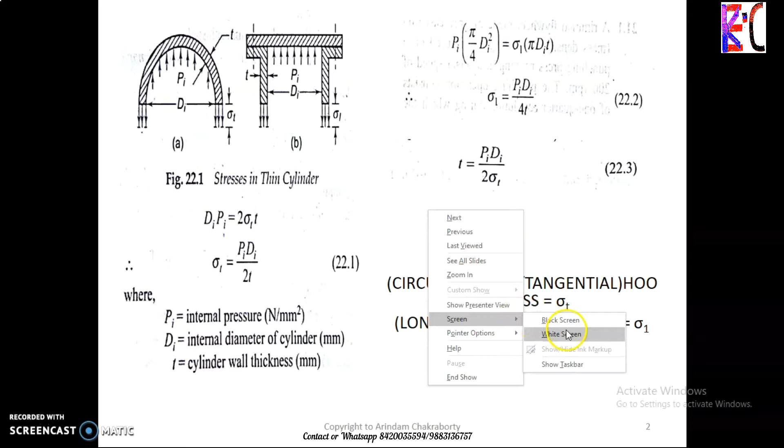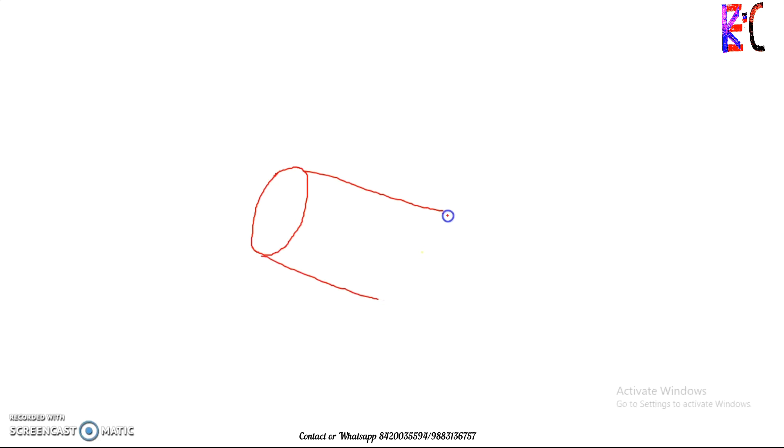Let me take one pen on the white screen. If you consider a pressure vessel like this one, the pressure acting on this circumference will be your hoop stress. Now the longitudinal stress, let me draw it. The pressure acting on the entire circumference is termed hoop stress, and the pressure working along the longitudinal direction is termed longitudinal stress. This circumference is connected to hoop stress, and this is connected to longitudinal stress.

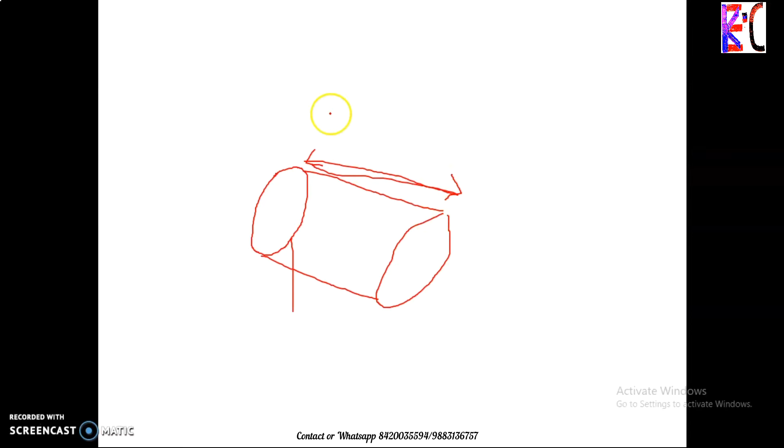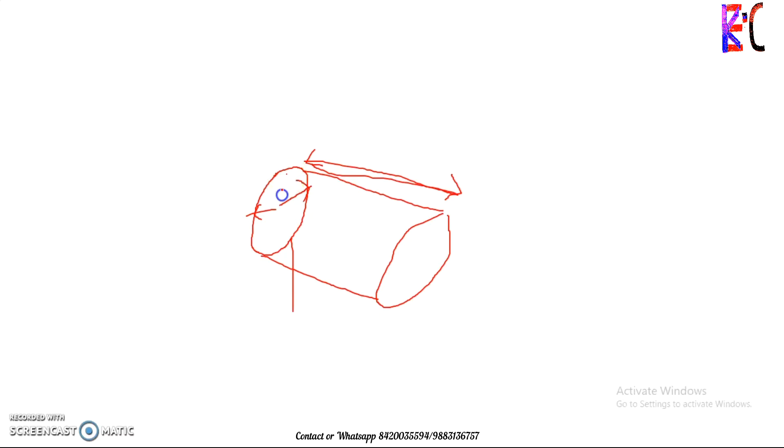How does it accumulate? If a body is highly pressurized, a force is acting from the center to every point of the circumference. That means you can't smash the bottle, as you can see in our cold drinks or soft drinks bottle. After opening the cap and retightening it, you could smash the bottle. But without opening the cap, the fluid inside is completely pressurized, so you can't smash it. So this is what happens.

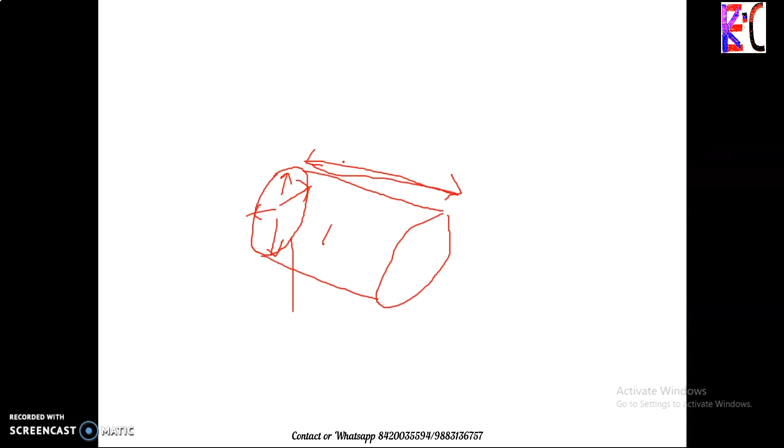So we have learned about pressurization and got one idea: one stress works on the circumference, one works on the longitude. Now pressure vessels have been divided into two categories: thick cylinders and thin cylinders. Scientists came up with a solution for how to determine thick and thin cylinders. So why is it so necessary?

Because to hold a pressure, sometimes you need to increase the material a lot, or decrease it. If you are holding an enormous amount of pressure, the border lining or circumference of the pressurized chamber should be maximum. So how much should it be? To understand the maximum and minimum thickness of the body to be assigned, ASME as well as the other regulators started features including thin and thick, so that they make it understood which one is thin and which is thick.

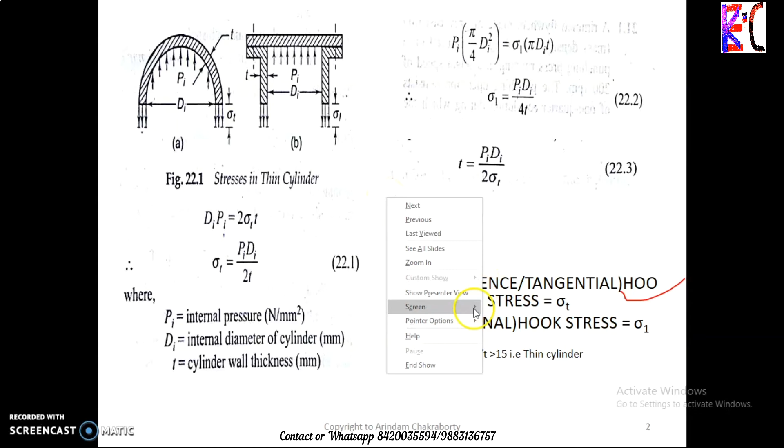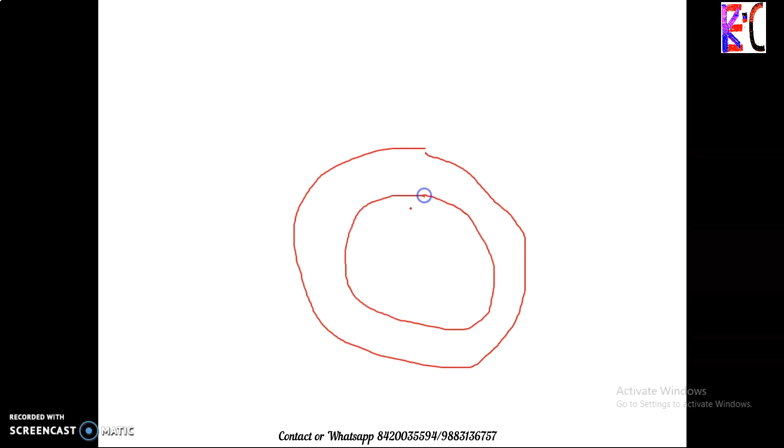Okay, my right click, and it's going to the white screen. Okay, so let us consider one circumference, another circumference. Take this to be the thickness T. This is the center of the circle, and this one to this one is di.

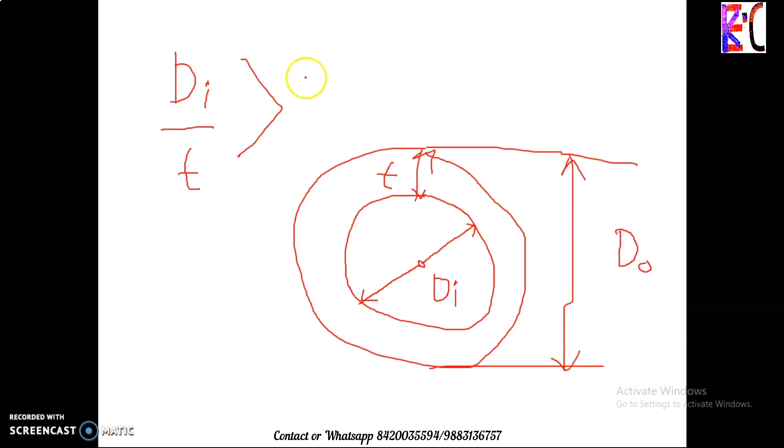Just a minute, let me complete this. Okay, let us understand what I have drawn. This is to make you understand in the simplest way. Let me make it visible. Okay, this is the thickness. Now what is the thickness? This is a cylinder, a cylinder cross section.

So this is the internal diameter of the cylinder and this is the external diameter of the cylinder, and the thickness is d naught minus di, that is d outside minus d inside, that is t, the thickness of the cylinder body. Understood? As per the ASME consideration, the ratio of di by t should be greater than 15 to consider a thin body.

So let us take one example. If the internal diameter is 15 and the thickness is 2, what comes? 15 divided by 2, that is 7.5. That means it's a thick cylinder, because we know for a thin cylinder the ratio should be greater than 15.

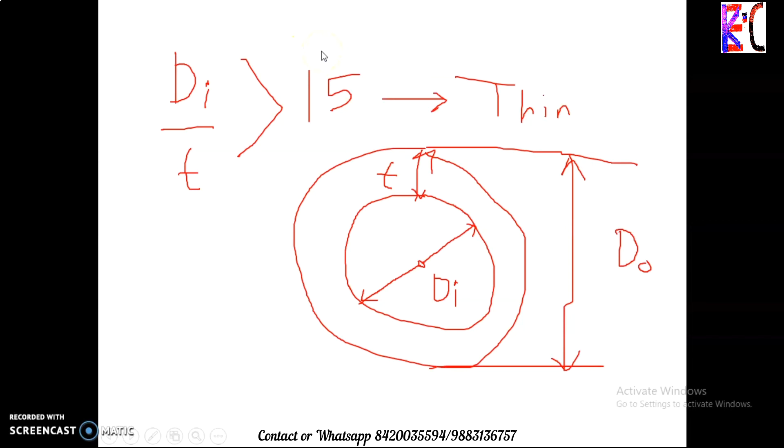If you have any problem, you could ask me again. This is not the first and last class. This is just the first class, an overall class. The problems will be solved in your coming classes. If you have a query, you may ask me. So let us go onward.

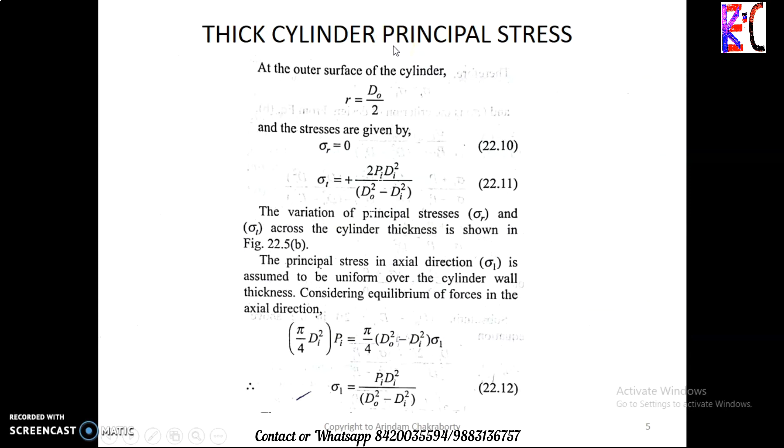Okay. So we have learned what thick cylinders are, how we consider thin cylinders, and how we consider thick cylinders. First of all, we calculate the thick cylinders in consideration of principal stress and strain. After that there are some laws. The thickness T, as you can see over here, is written as T.

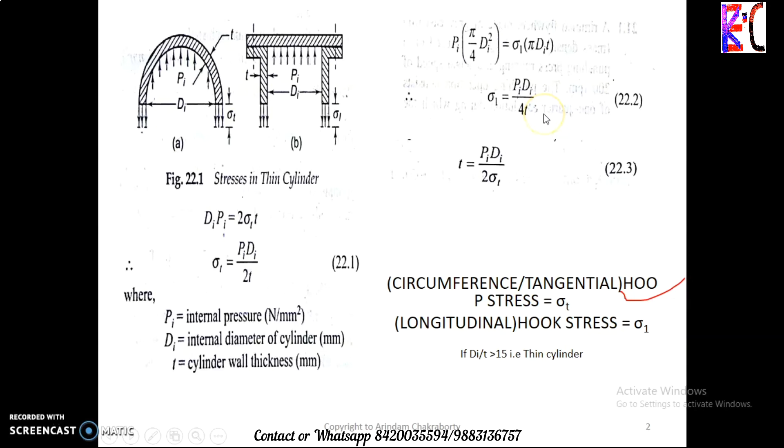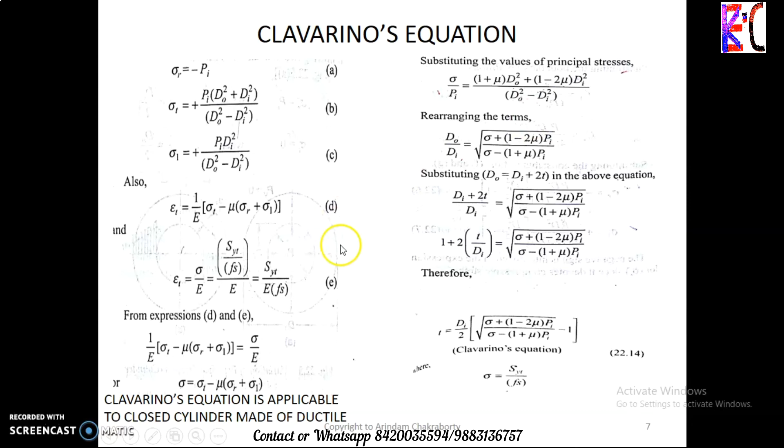This T depends on a few factors. There are some equations made by our scientists and scholars, termed Clavarino's, or you may go for Birnie's equations, or other equations, the Lame's equations. So everything is related to certain equations. Why? Some have considered a completely closed chamber, some have considered semi-closed cylinders, or anything.

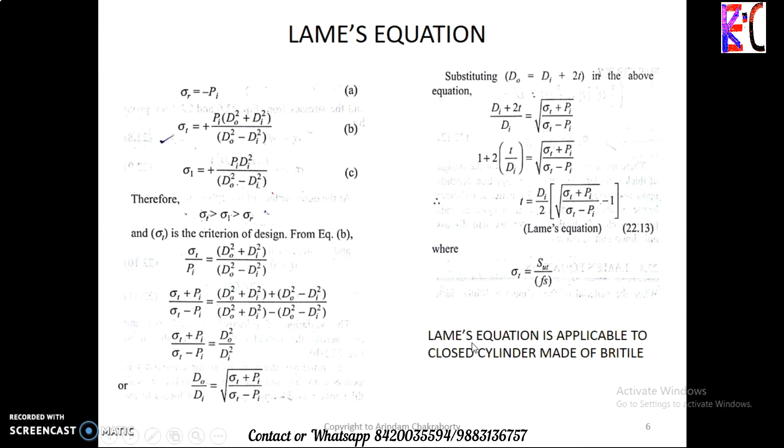So you can't say that you have to determine T, the thickness of the cylinder, in just one way. You have to determine it in all ways and find the best suited for your application. In coming classes we learn about Lame's equations, Clavarino's equations, Birnie's equations, and how they work, as well as how a thick cylinder is related to thin cylinders, and how a thick cylinder can explain every criteria of pressure vessels or pressure cylinders.

Okay. Now before going back, a pressure vessel doesn't mean that it should be a cylinder. It may or may not be a cylinder. As you can see, it has been considered in terms of cylinders, but if you go back, it has not been. So the cross section can be a cylinder cross section, a rectangular cross section, triangular cross section, or anything.